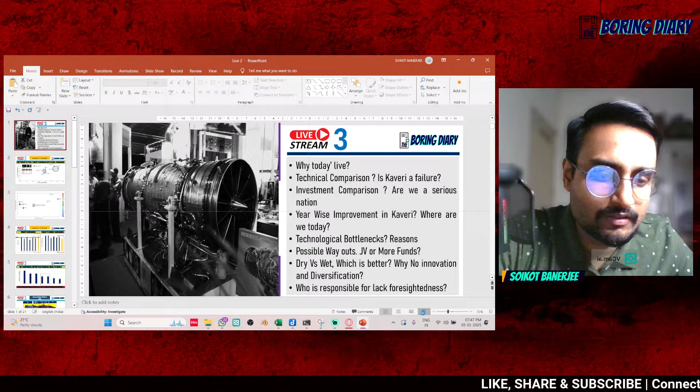तो पहले हम ये डिस्कस कर लेते हैं कि what are the knowledge you will be getting today from this session. First is that we will discuss why this session, the context of this session. Then we will get into the technical comparison of the Kaveri engine, और वहाँ पे हम कंपेयर करेंगे कावेरी इंजन को एग्जिस्टिंग इंजन्स के साथ जो 4.5 जनरेशन की एयरक्राफ्ट्स है।

देन वी विल गेट इनटू द इन्वेस्टमेंट कंपैरिजन। There are some caveats here, but still the investment gone into the R&D of these engines needs to be studied.

Then we will get into the year-wise improvement in the Kaveri engine, and with that will create a question in your mind that what exactly do we want.

Next is the technological bottlenecks that we will be discussing in great detail, and we will also discuss the testing facilities that have been created in India, and what are the gaps there.

And next is what are the possible ways out of these bottlenecks, since we are desperately in need of an engine. And the next point is who is responsible for this lack of foresightedness.

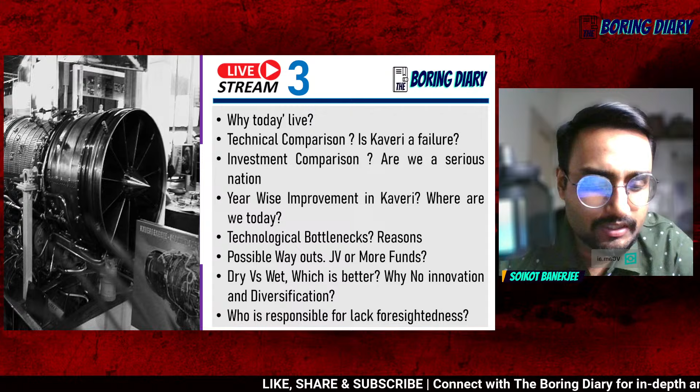fundamentally conceived as an engine that will be used as a primary engine for the LCA program, but it did not come out to be as well as expected.

The fundamental reason for this was, I don't know if you people are aware or not, but when the LCA Mark 1A program was being researched upon, a lot of testing was being done in the United States. I think it's either University of Buffalo, या फिर there is a lab in Buffalo in USA where a lot of the research and development part of the LCA Tejas Mark 1, or the LCA Tejas program as a whole, has happened.

This was before the 1998 nuclear test. Once the 1998 or 1999 nuclear test happened, a lot of restrictions or sanctions were put in on India. After those sanctions, our scientists were asked to leave the United States immediately, and since then a lot of progress that was being made on the LCA program went into vain, and that included the engine part.

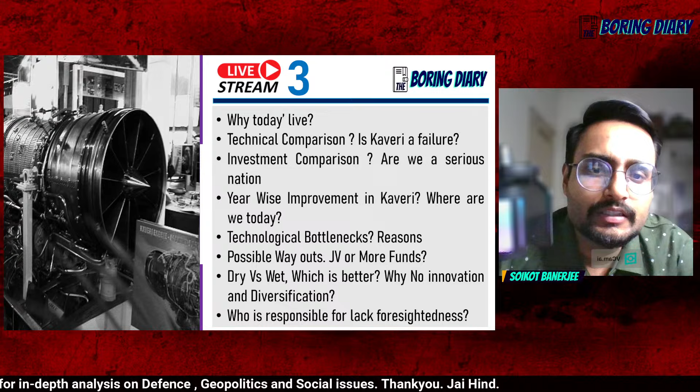आफ्टर दैट, उसके बाद क्या हुआ, हमने कावेरी इंजन पे जो रिसर्च थी वो खुद करना स्टार्ट किया, एंड इवेंचुअली वी डिड मेक सम इंजन्स बट इट हैड मैनी इश्यूज, एंड बिकॉज ऑफ दैट

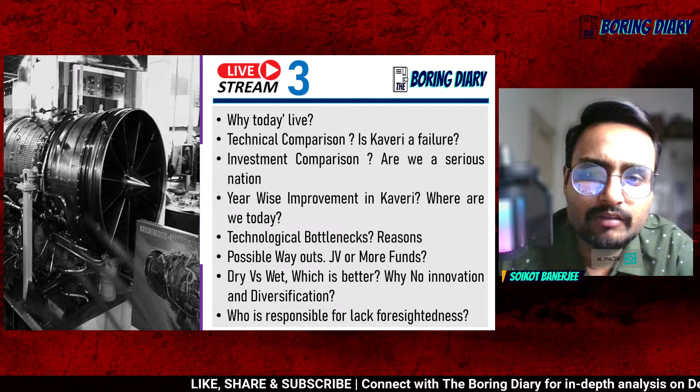that delays had happened. But we will come to see what our country has achieved in the Kaveri engine with the amount of funds that have been given. The ROI has been excellent.

People won't believe it, but believe me, if you compare the ROI, that is return on investment, the amount of investment that India has done and the amount of investment the Western countries or even China has done for that matter, उस हिसाब से India has done a fabulous job getting directly onto a 4 or 4.5 generation engine.

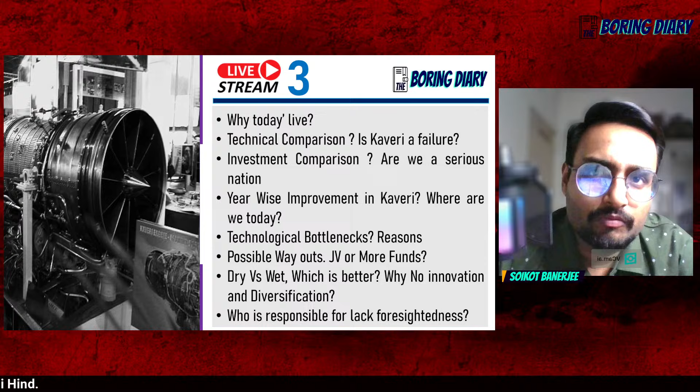Now enough of talking, let's get into the meat of the discussion here. So we will be comparing the Kaveri's thrust with the global competitors here.

So we have the GE404, that is currently the primary engine for the LCA Tejas, both Mark 1 and Mark 1A, the RD33, the WS13, and the M88 engine. GE414 is the engine for AMCA, WS13 is for the Chinese one, and EJ200 is for the Eurofighter Typhoon.

So if you want to know which engine is on which aircraft, I will clear that for you. The EJ200 is in the Eurofighter Typhoon, GE414 I think is on the FA-18 Super Hornet, M88 is on the Rafale - that's why I have marked it in green in the table. RD33 is on the MiG-29, and the GE404, as I said, is on the LCAs. WS13 I think is on the J20, and the Kaveri as such is the subject of our discussion.

So when we plot a scatter plot where on the x-axis we compare the dry thrust - dry thrust is basically the amount of force that the engine is producing without the use of an afterburner - so if you compare the Kaveri with other engines, one second, I will get my pointer.

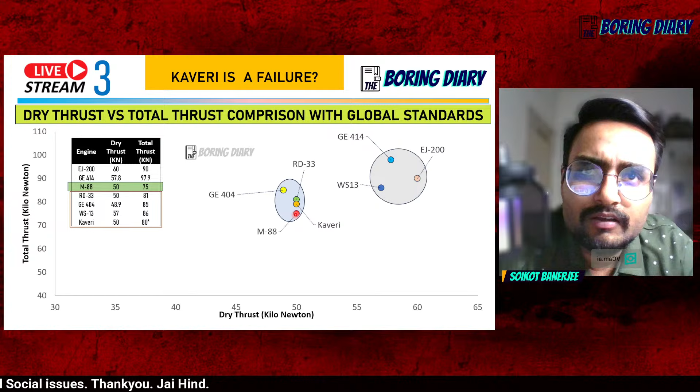But in any case, the Kaveri in its dry format is a very good engine in my opinion, and it is comparable to any contemporary fighter jet's engine in the medium category.

So if we extend the scope of the graph to the weight, this is where the Kaveri's problem starts. It's a heavy engine, and because of that it faces major challenges as of now.

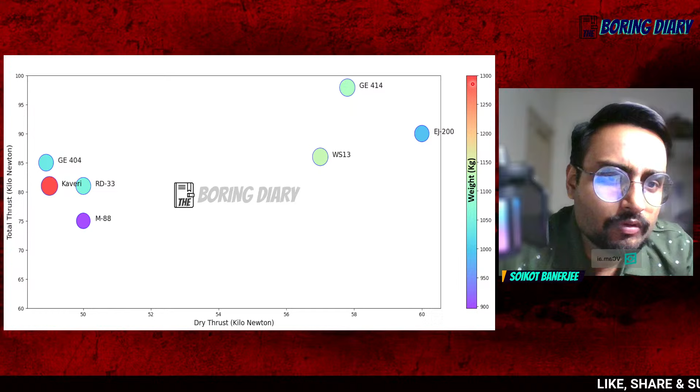So if you see this weight parameter, each color represents a kind of amount - the total weight of the engine, the dry weight without the afterburner. If you compare color wise, green or bluish is a lighter engine, and if the bubble is in red color, then it's a relatively heavier engine.

So if you see that the Kaveri isn't particularly... yes user, X701 it's 1100 kg - no, it's not 1100 kg, I will come to that, it's 1180, I will come to that user.

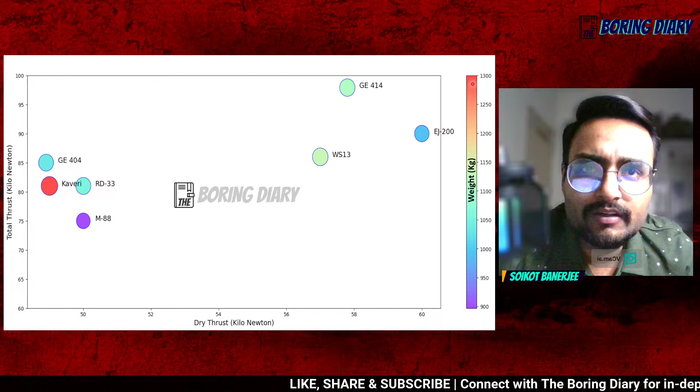So yes, the Kaveri engine is a heavier one, and this is where one of the issues lies. So if we come to the weight comparison, if we take 1100 kg as the baseline, it is not as if the Kaveri engine is extremely heavy - there are many engines that are basically of the same similar category. The Chinese one is 1135, the GE414 is 1110, and the Kaveri engine is 1180.

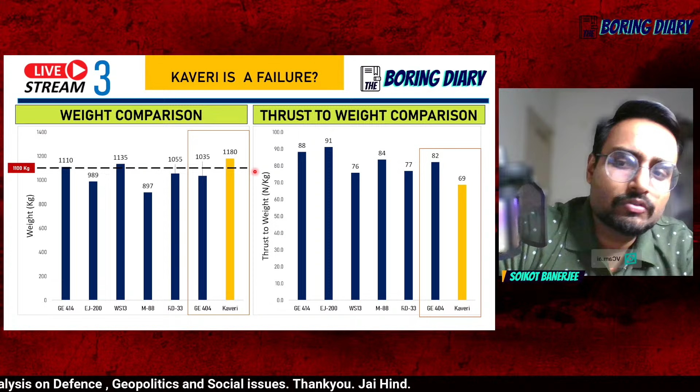So even if we take 1100 as the baseline, we are 80 kilos above getting into the contemporary or peer jet engines. So what is the issue? Being a heavier engine, it costs the Kaveri a lot on the thrust to weight ratio, which is quite compromised because of the relatively higher weight. Again, I won't say this margin is too high, but there has already been a lot of weight reduction exercises on the Kaveri engine.

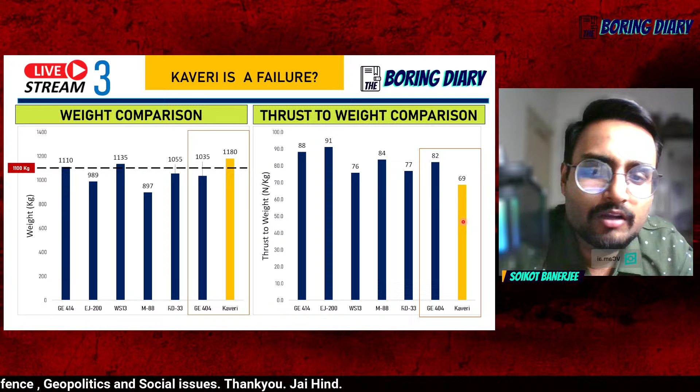If you see all through these graphs and charts, you will realize one thing: the biggest advantage of the Rafale engine, or the European engines in general, is that they are very light. One thing they have sorted out very well is their metallurgy. They have figured out their material science very well, and that has helped them achieve this low weight, which helps improve the thrust to weight ratio of the engine.

But you can see here in terms of dry thrust, the Kaveri is very much close to the M88. But in the total thrust case, when the Kaveri gets to its afterburner part successfully, it will create more thrust than the M88. So that is one thing.

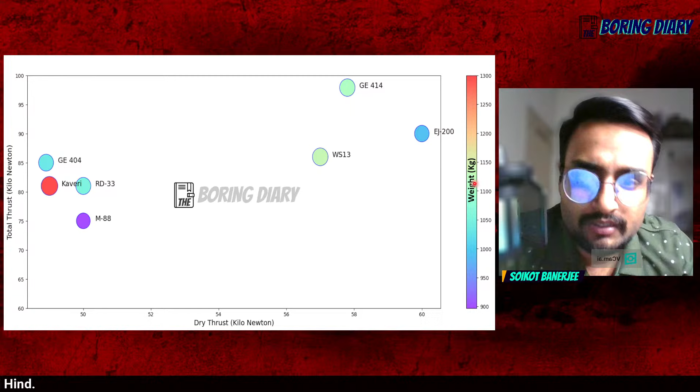This will raise a question that I will share with you in the coming decks: why, if the Kaveri engine becomes successful, it becomes almost equivalent or in some cases better than the Rafale engine. So what makes us think

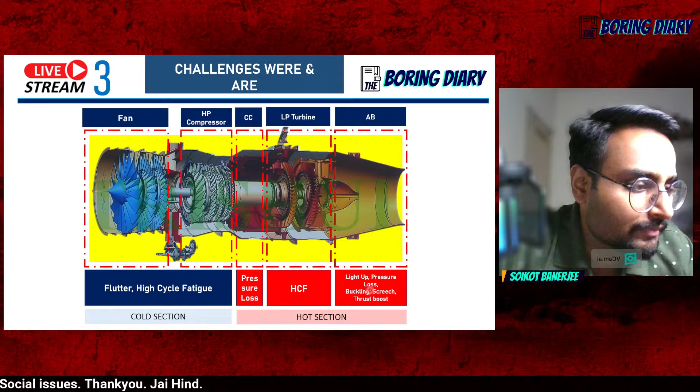Ujjwal ji asks does the current Kaveri use it? I think so, I think the newer one uses it. I will come into it, Ujjwal ji. There is a section in this, and we will get into the hardcore details of single crystal blade. Don't worry, I have covered it here.

So this is the list of issues that are currently existing in the Kaveri, or I would say this deck is from 2022. In the 2022 version of the Kaveri, these were the major issues.

So if you ask me, my analysis is that when the engine is moving ahead into flight test bed in Russia, I think they have figured out a lot of issues, especially in the cold section. They may have figured out the flutter and high cycle fatigue in the cold section, which I will explain, what these issues are and how they look.

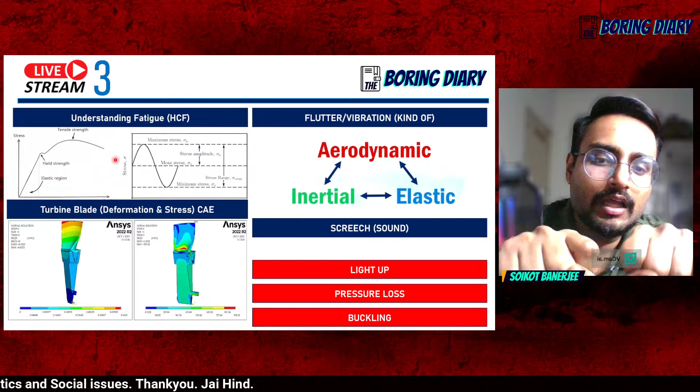तो उसमें मान लीजिए एक्स अमाउंट ऑफ फोर्स लगा, बट आप उस एक साइकिल स्पोक लो, उसको हल्का हल्का बार बार मोड़ते रहो, आप देखोगे आफ्टर एन नंबर ऑफ टाइम्स, पहले जितना फोर्स लगाया था उसके कम फोर्स में ही वो साइकिल स्पोक टूट गया.

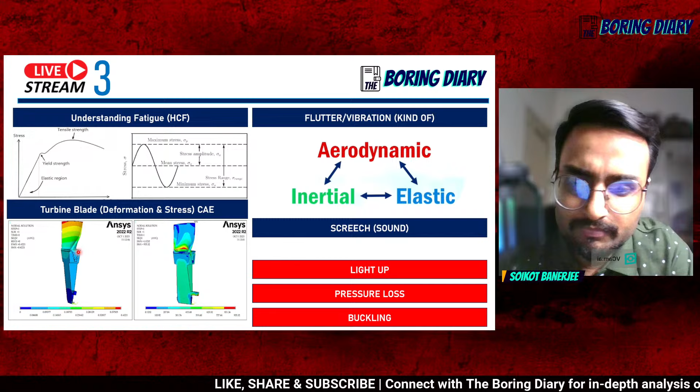So when you see this turbine blade, here I have the turbine blade CAE analysis. So when you see deformation, what are the primary forces on a turbine blade - it is rotating at a very high speed, और उसकी वजह से उस पर एक सेंट्रीफ्यूगल फोर्स होता है, उसके रूट पे इसे फिक्स किया गया है वहाँ पे फोर्सेस होते हैं, और एयर फ्लो और एयर प्रेशर की वजह से भी कुछ फोर्सेस होते हैं. So you will see there is a lot of scope for deformation on the upper part of the blade.

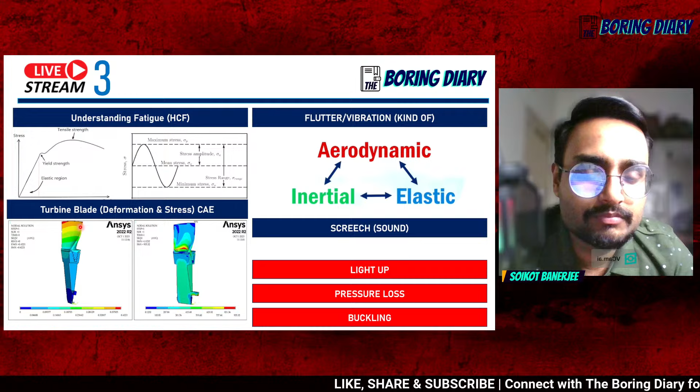That is the problem that was causing failure in the engine blades in the earlier Kaveri engine, that there were deformations happening due to high cycle fatigue, और उसके बाद इंजन में इश्यूज आने लगते हैं.

नेक्स्ट इज द फ्लटर इशू, that is when the aerodynamic force - that is the force of the air flowing - and the elasticity of the metal interact. मेटल का एक अपना elasticity रहता है, और उसकी वजह से फ्लो में जो इश्यूज रहते हैं यानी कि वेरिएशंस, उसकी वजह से... आई डोंट वांट टू गो इनटू एक्सट्रीम डिटेल, बट आई एम गिविंग यू एन आइडिया.

तो उसकी वजह से ये जो तीन फोर्सेस एक्ट करते हैं, उसकी वजह से बहुत ही एग्रेसिव वाइब्रेशन होने लगता है उस टरबाइन ब्लेड्स में. तो ये एक इशू है.

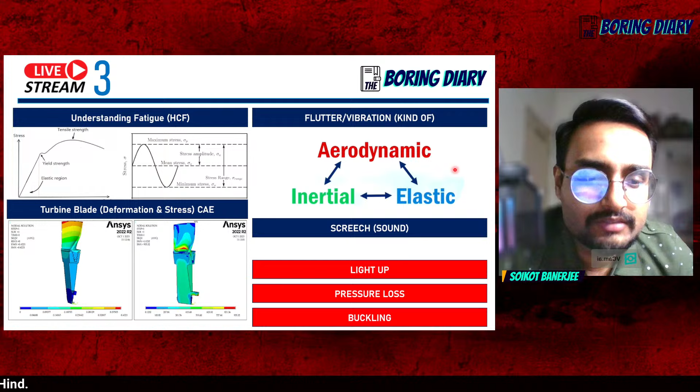स्क्रीच जो आपने आफ्टर बर्नर में देखा है कि बहुत श्रिल साउंड होता है, और लाइट अप, प्रेशर लॉस, बकलिंग - ये सब जो आफ्टर बर्नर में था, these are primarily because of the high heat. So that's a kind of material science issue.

Now coming to the single crystal blades, we need to understand what is a single crystal blade. So if you see here, this is a microstructure of titanium or any metal you take. If you look at any metal in the microscope, you will see these little terrains or grains like structures with black color boundaries to it. These are called the crystals, and these crystals basically contain atoms of the particular metal.

What this actually means is that the atoms, in this case, are aligned in different ways. I am oversimplifying, but the fundamental part is that the atoms in the polycrystal material are aligned in different directions, and when these grains interact with each other, boundaries are formed. सो सिंगल क्रिस्टल ब्लेड में क्या होता है, ये बाउंड्रीज होती ही नहीं है. नाउ व्हाई आर दिस बाउंड्रीज बैड?

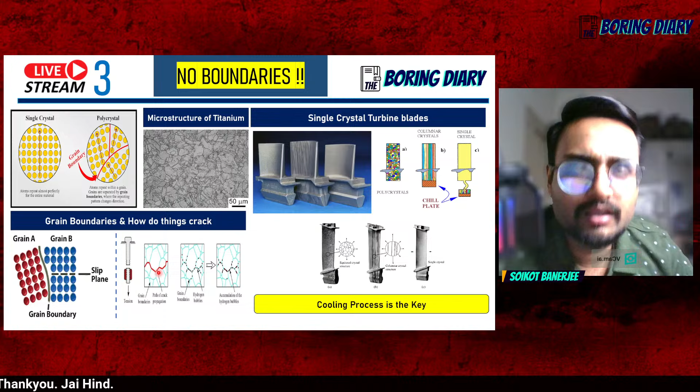So whenever you see that a failure happens, a crack happens in a metal piece or something, these cracks actually initiate from these grain boundaries. So if these grain boundaries are removed, this will improve the strength of the object by many times, both the strength in general and the heat resisting capacity of the turbine blade.

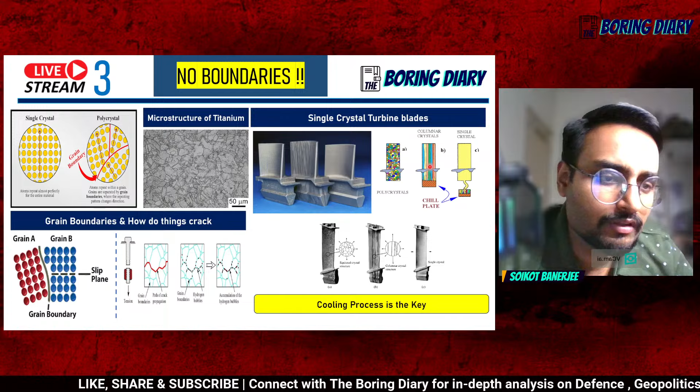So this brings us to the diagram here. This is a polycrystal, that is multicrystal turbine blade which is not a single crystal. This is columnar crystal, that is blades where the crystals are in the vertical direction, with boundary grains, and the single crystal blade has no boundaries, no grain boundaries. So this is how a single crystal blade looks - the right one here is the single crystal blade, this is the columnar crystal blade, and this is the polycrystal turbine blade.

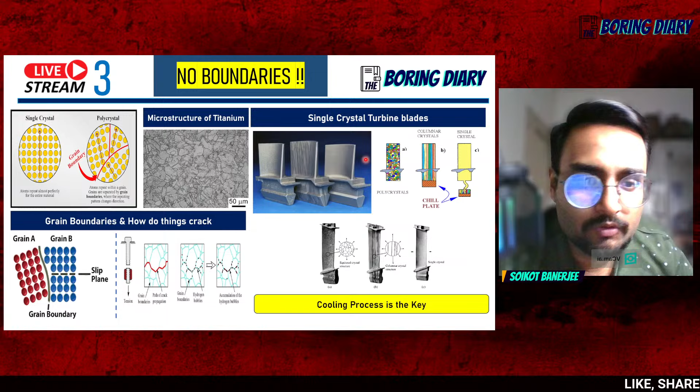So we are looking to get success in this single crystal blade for fighter jets in this case. So how is this single crystal turbine blade created? This single crystal turbine blade is a magic of cooling - we have to cool the molten metal in a certain way to get this particular structure, single crystal structure.

So before that, मुझे आपको ये समझाना पड़ेगा कि जब मेटल कूल होता है तो वो कैसे होता है, तो उसमें ग्रेन बाउंड्रीज कैसे होती है. So let's move on to the metal solidification process.

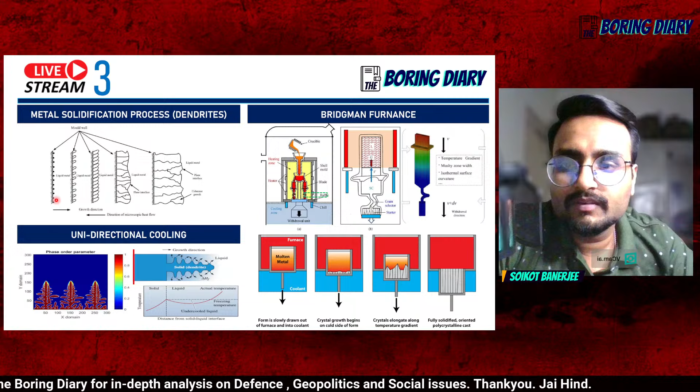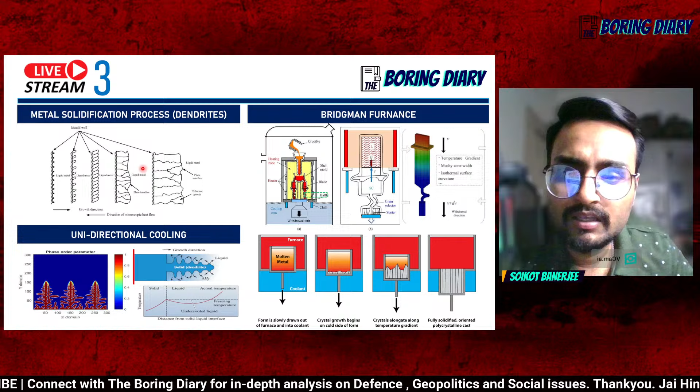मोल्ड वॉल, अगर आप देखोगे इसमें लिक्विड, लेट्स से आपने यहाँ पे मोल्टन मेटल एक ग्लास में डाला और बाहर से ठंडा एनवायरनमेंट प्रोवाइड किया, then these dendrites are formed, and these dendrites slowly move ahead towards the center of the jar or crucible you have taken for solidification, and these grains are formed. So this is the dendrite formation in case of solidification of metal.

So in case of these single crystal blade, जो कूलिंग होती है, वो ऐसे होती है कि आपको एक ही साइड से कूलिंग देनी है. जैसे तलवार जब बनाते हैं तो गर्म लोहे को पूरा का पूरा पानी में डुबो देते हैं. जब आप पानी में डुबो देते हो, then you are giving cold temperature from all sides.

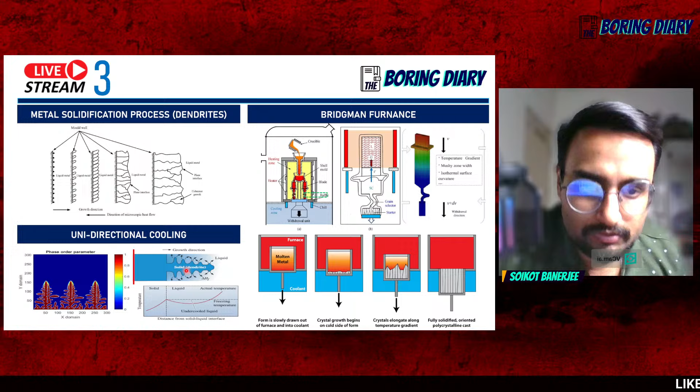बट व्हाट आई एम टेलिंग इज़ दैट अगर आप उस गर्म तलवार को बस उसके लोअर या फिर अपर पार्ट, यानी कि जो नुकीला पार्ट है, वहाँ से ही सिर्फ कूलिंग टेम्परेचर प्रोवाइड करते हो, तो उस केस में जो सॉलिडिफिकेशन होगा वो अलग होगा। या आई विल कम टू दिस कंपनीज पार्ट, नो इश्यूज।

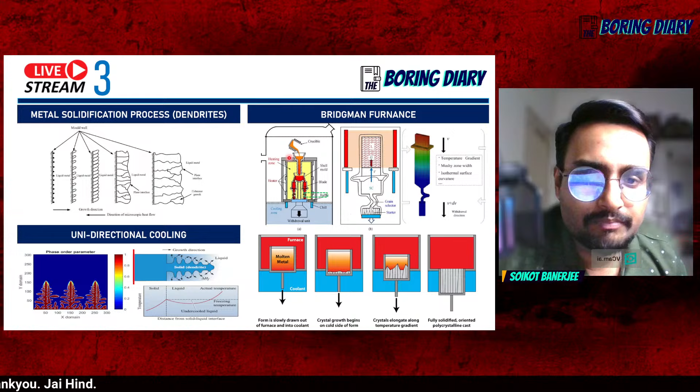So coming to the part कि कैसे बनता है सिंगल क्रिस्टल ब्लेड. दिस इज़ अ ब्रिजमैन फर्नेस. यहाँ पे क्या होता है, आप देख रहे होंगे यहाँ पे।

ब्रिजमैन फर्नेस में यहाँ पे आपका फर्नेस है, यहाँ पे आपने अपने टर्बाइन ब्लेड्स के मोल्ड्स रखे हुए हैं, और नीचे से आपको कोल्ड टेम्परेचर सप्लाई किया जा रहा है थ्रू कोल्ड वाटर और वट एवर यू हैव. सो आप पूरे के पूरे ब्लेड को नहीं डुबो रहे हो फॉर कूलिंग, बट आप नीचे से उसको कूलिंग टेम्परेचर दे रहे हो।

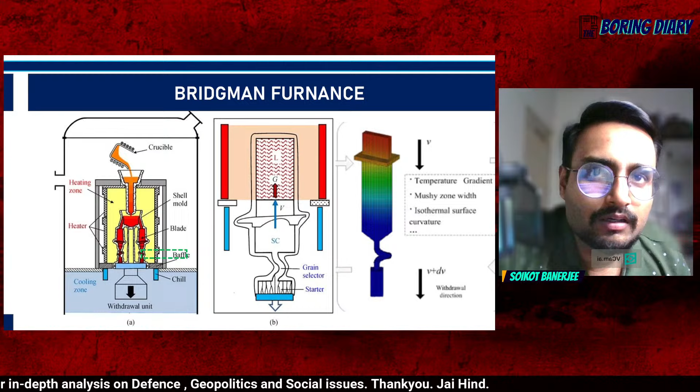एंड टू अवॉइड मल्टीग्रेन स्ट्रक्चर एक फ़िल्टर टाइप दिया जाता है उसको, वो एक हेलिकल 3D पाइप की तरह होता है, जिसे ग्रेन सेलेक्टर या पिग टेल बोलते हैं. तो ये जो मल्टीपल ग्रेन फॉर्मेशन स्टार्टर में दिख रहा है, दिस फिल्टर आउट दिस मल्टीपल ग्रेन फॉर्मेशन, एंड इट अलाउज ओनली सिंगल क्रिस्टल to propagate upwards towards the hot chamber. So ऐसे बनता है आपका सिंगल क्रिस्टल टर्बाइन ब्लेड।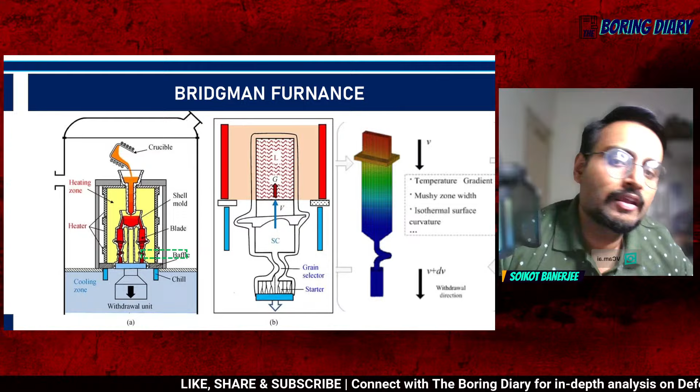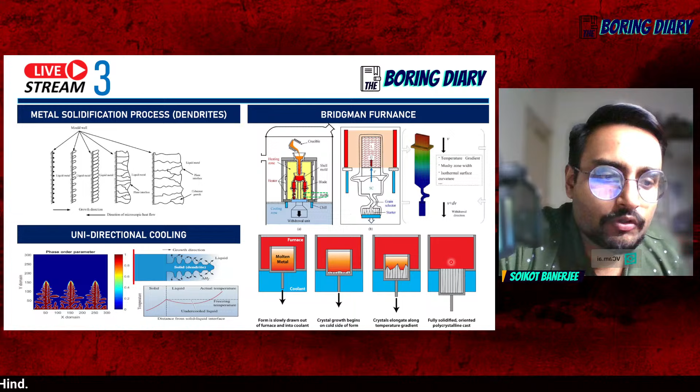इस कूलिंग प्रोसेस को बोलते हैं यूनी डायरेक्शनल कूलिंग. यहाँ पे जो स्टार्टर वाला पार्ट है उसका एक डिटेल्ड व्यू है. यहाँ पे मल्टीपल ग्रेन्स हैं, फिर यहाँ पे एक सिलेक्टर या पिग टेल लगाया जाता है. पिग टेल के थ्रू सिर्फ एक ही क्रिस्टल ऊपर की तरफ सॉलिडिफाई होता जाता है, and then it becomes, then the entire mold is solidified into a single crystal blade।

So the good thing about titanium, we have a good news which I will be discussing in the next slides. Titanium has been a challenge for us because in general titanium across globe has been primarily supplied by Russia and some handful of certain countries. I think even China is also a major player in the supply chain. So that is one thing.

So the good news is that PTC Industries has opened a furnace. How many furnaces I don't know, but the investment says there are more than one furnaces opened for making these titanium ingots. These titanium ingots are a very key issue in the engine and fighter jet development as well. You need titanium alloys in the engine and in the aircraft body as well. दोनों केस में आपको टाइटेनियम की बहुत ज़रूरत होती है because it's strong, it is light, and it has now become the standard go-to base material for high tech military grade equipments.

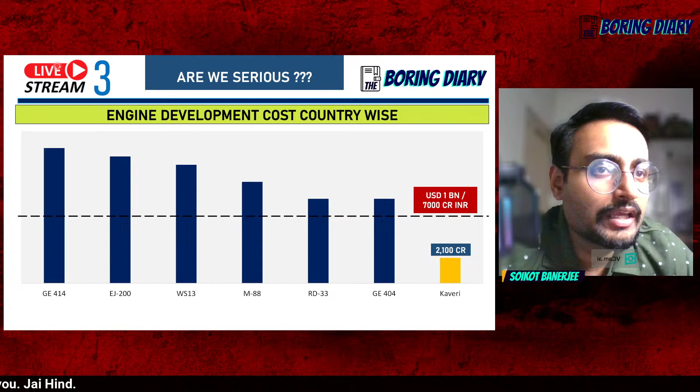Now comes the funding part. So these are some funding that I have understood, the Americans have actually pushed in more than $1 billion on their single engine, meaning on each of the engine development program. They don't have just one engine program running, and वो लोग पानी बहाते हैं engine development पे. I will come to the joke that has been created out of Kaveri. But if you see, this is a $1 billion mark for an engine development program, and they have developed jet engines for, Americans have developed jet engines for...

Okay, so Somnath da, I understood. Japan is also, yeah, thank you. I will come to the questions once I am done with the presentation.

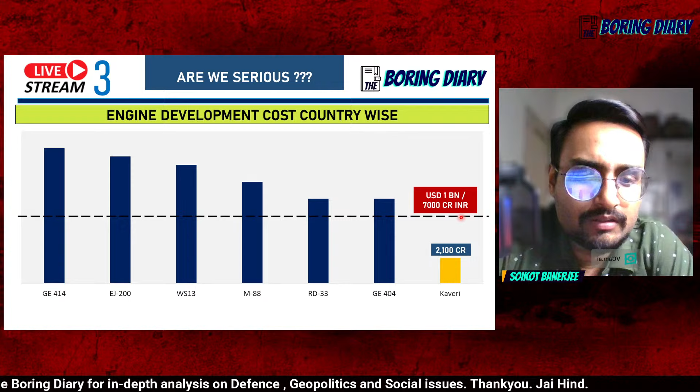Coming to the Kaveri thing. The joke of the Kaveri engine is that we have been able to create an engine providing us almost 71 kilonewtons of thrust, albeit with some struggles. That is not close to what was needed for the LCA Tejas, but it's close to many fourth generation fighter jet engines. We have compared with some of them, in the 70 to 75 category, one of them being the RD-33.

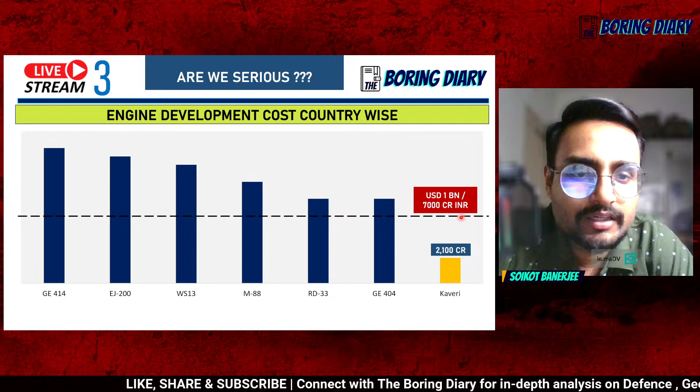You go out comparing LCA Tejas with foreign platforms, but they don't compare the funding that these platforms and their engines have got. What we have achieved in a very limited constrained budget is unparalleled. And by 'we' I mean the DRDO. Of course there are inefficiencies, but this is unparalleled. The ROI is huge, it can't be compared.

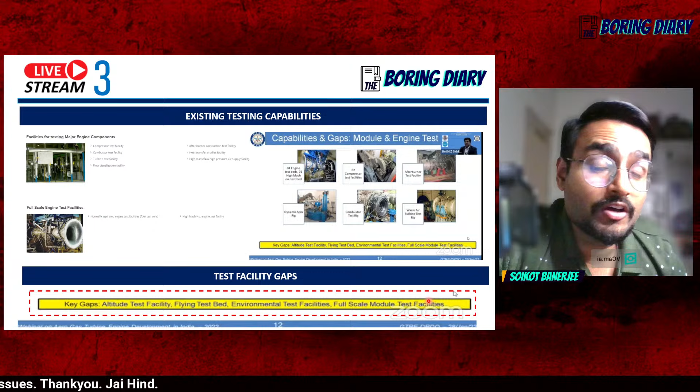And then environmental test facilities. See, environmental testing facility is one area where there is a lot of scope for any businessman looking to invest money, because environment test facilities are needed everywhere - be it in case of jet engines, tanks, APCs, radars, guns. Environmental testing facilities are a must have for any military hardware platform development.

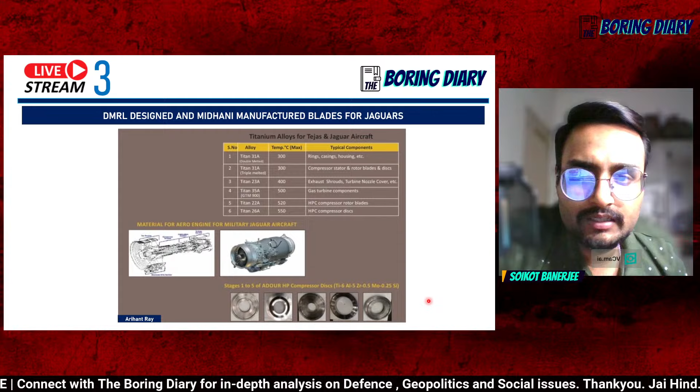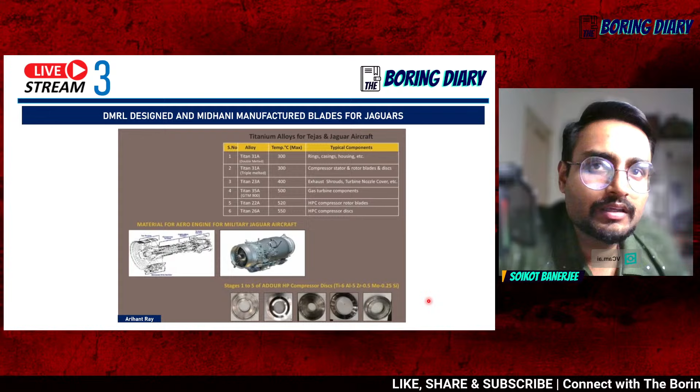Next, there have been some progress. This is one I got from Twitter - somebody shared that DMRL designed and MIDHANI manufactured blades were used for refurbishing Jaguar's engine. So if we speak about two major players currently manufacturing titanium or titanium products - finished products, not extracting ore and refining, but finished products - that is MIDHANI, and I think even Bharat Forge does it to some extent. I'm not clear, but in any case MIDHANI is one such major player.

All these developments give me some sort of hope, but it also has a baggage of concerns for me, and most of the concerns come from the budgeting part. The budgets are too low. We are not serious about this. In talk we are serious, but when it actually comes to allocating funds, we don't look so serious. Now next point is the private sector jet engine.

I've heard many people ask why the private sector is not developing a jet engine. So look, I shared a lot of this design process with you - how much trial and error, time and money goes into it. Do give it a thought, are Indian companies willing to invest this much into developing a full grown fighter jet engine? I think not. We will have smaller scale turbine engines, but a full scale jet engine from a private player - it won't happen anytime soon.

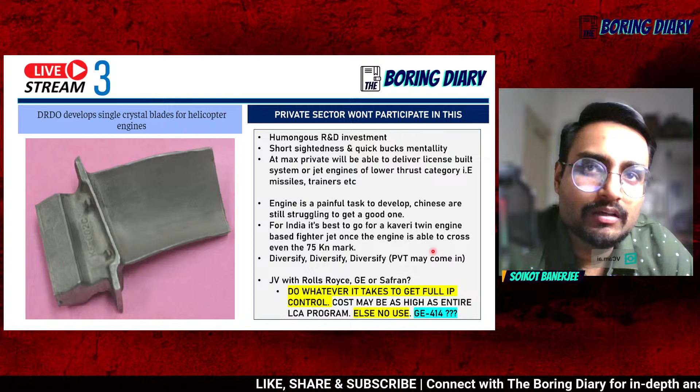Next, from the presentation you might be aware that the Kaveri engine needs to be diversified into other fields where gas turbine engines are usually deployed, mostly in the power sector. We can also spin it off into marine engines, and other applications wherever gas turbine engines can be deployed.

Next point is about JVs. On the JV with Rolls Royce, GE and Safran, I'm not going to comment, but we should make sure if we are getting into a JV, we should have complete intellectual property control of whatever transfer of technology we are asking for.

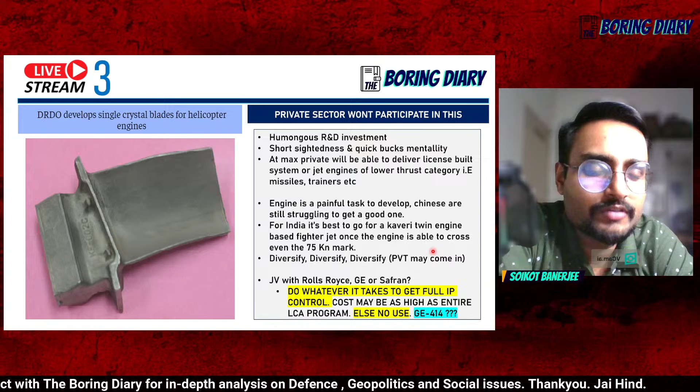And if it costs a hell of a lot of money, maybe equivalent to the MRFA deal, or even the entire cost of the LCA program, make sure that if you are taking transfer of technology of the core section, it should be full and final, no strings attached, nothing, no ifs and buts from the selling company.

That's how it should be taken. And I think if complete transfer of technology happens, the government should publish what the caveats are, but should not disclose the amount, provided they are able to secure complete intellectual property.

Next slide. This is my thought on the Kaveri's scalability. These are my thoughts: Kaveri's scalability is a huge competitor to global players.

Somnath, this might be an answer to your question. Kaveri's scalability is a huge competitor to global players. Why will anybody give you transfer of technology to create their own competitor? Even if it does, are there any strings attached regarding India's sovereignty or market access for Kaveri related products in future? That needs to be answered by whoever is concerned.

Now someone will say, who am I? But I am no one, yet people should know that when deals regarding strategic systems happen, it should not come at a cost of our sovereignty.

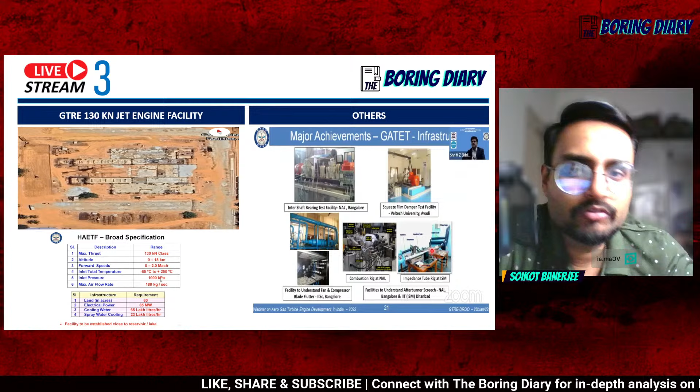Hopefully, because if you understand that in the last test in 2022, it was able to generate 48.5 to 50 kilonewton of thrust, that means the blades were doing pretty well. In that case we can infer that if they used the single crystal blades in the low pressure turbine section during that test, it was working perfectly well. But again, this is an inference.

CMCs, I am not sure if they have gone for it till now, but a single crystal blade maybe. CMCs may also be there. I did see some pictures of CMCs that were shared in some of the Aero Indias and Defense Expo by DRDO and GTRE.

On J20, can India's AMCA counter the future threat from China? I will make a different presentation for J20 and J36 and regarding AMCA.

Again, this takes a lot of effort to produce this deck or presentation. I think AMCA isn't going to be a 5th generation fighter, it's going to be a 5.5 generation fighter, because the core or fundamental part of a 6th generation fighter is not just the shape and the platform, it's also the avionics. So if we are able to integrate the avionics well into the AMCA, it can be given a capable 5.5 generation capability.

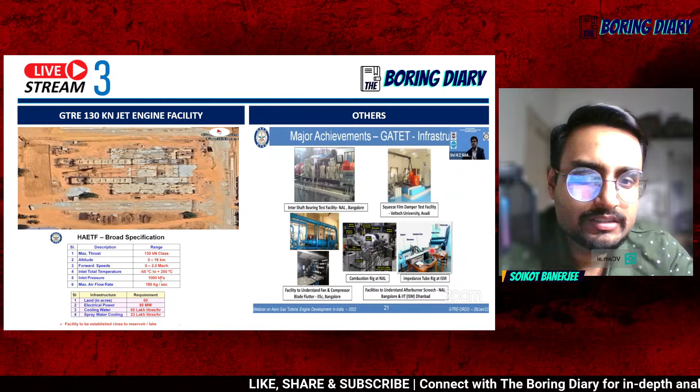So J20 and J36 are a threat, but even if we go well with our existing Su-30 MKI upgrade programs, LCA Mark II which I think is up for first flight this year, and we are able to produce the AMCA Mark I by 2032 or 35, then we don't need to worry that J36 or J20 are there. But we first need a decent amount of indigenous fighters in the 4 to 4.5 and 5th generation category.

Again, my thinking is that as we go ahead in time, the technologies that come up in this platform will be better. It will be far better in terms of preserving sovereignty if these technologies are generated in-house, majorly generated in-house with some foreign help, but I think the intellectual property must reside with India, that is Bharat.

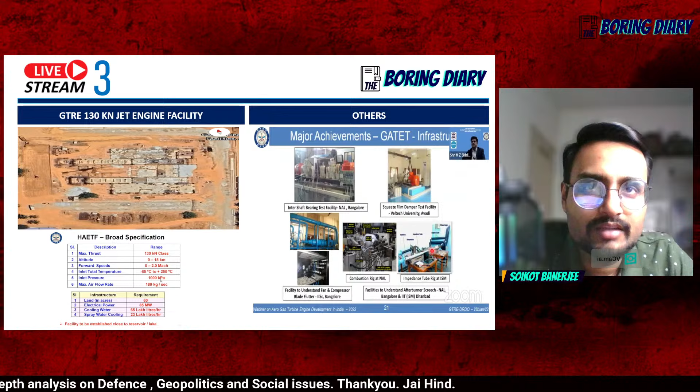What needs to be done to reduce weight in our engines? It's purely material science, sir. We need to put more money in our metallurgy. Our best metallurgy people mostly go abroad. People don't have any idea the amount of material science engineers that leave this country for pursuing higher studies in Germany and the US.

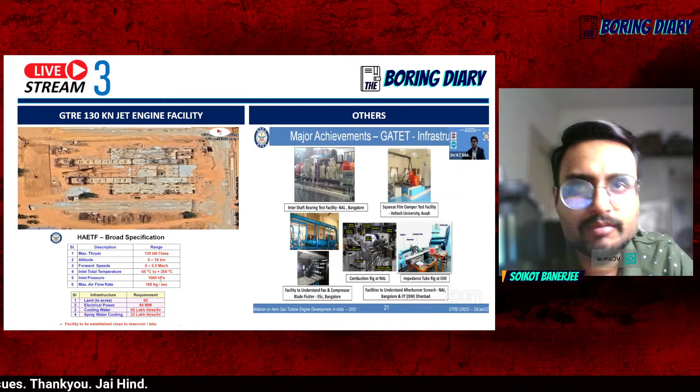Don't you think US is a threat to India? I don't think threat as per se. I won't pass a sweeping statement, but yes, there are two parts in USA - one is very pro India, one is not so pro India, because the not so pro India part sees the world as a binary. That is, if somebody is friends with Russia, then that country is against America. They think too much in binary, and that is causing the general geopolitical issues coming forward within the relationship of USA and India.

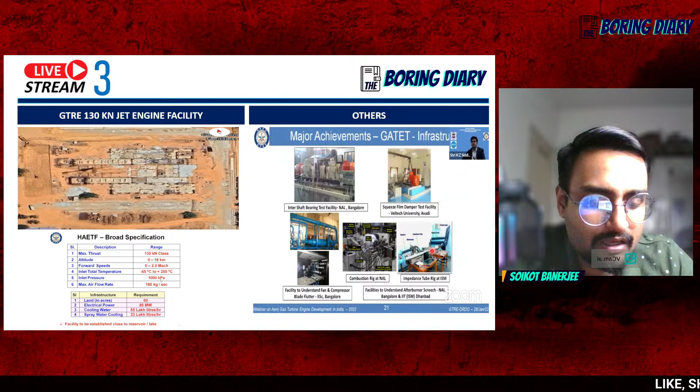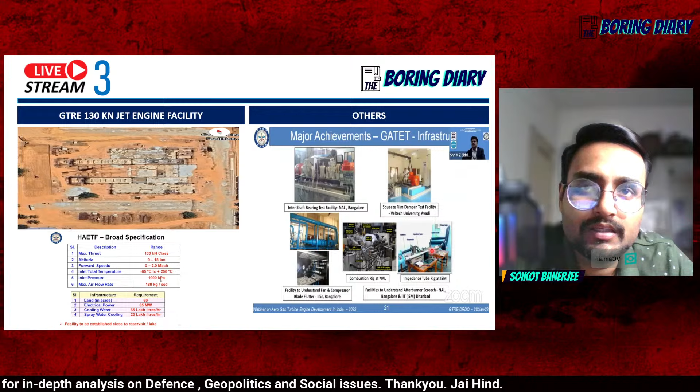I think so, as I said, I can't say with complete authority whether it's in there or not. But considering that in the prior test the engine was able to over-deliver on the benchmark, that alone proves the engine was able to sustain increased temperatures in the low pressure turbine part, and that gives me a hint that the new single crystal blades might have been there, because DRDO has already delivered single crystal turbine blades for helicopters, to be used in helicopters by HAL. This is the single crystal blade that DRDO has developed. So I think they have incorporated single crystal blades, but I can't say with complete certainty.

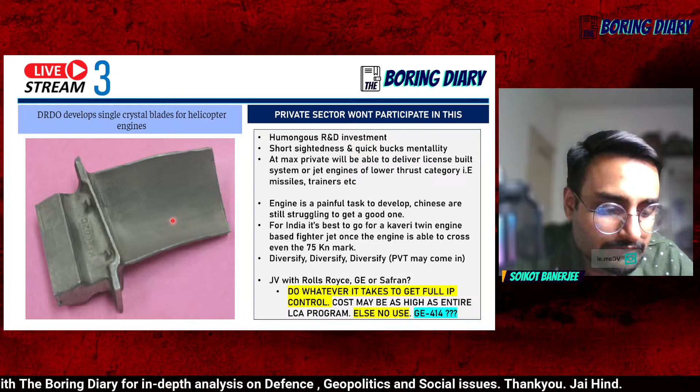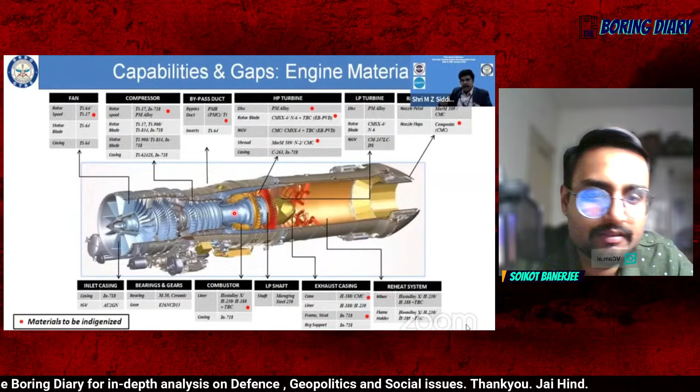GE-414 must have a backup, that's why we have a 130 kilonewton test facility coming up. This particular engine being discussed was a potential AMCA jet engine of the 110 category class. So yes, we are looking for an alternative to GE-414. The government may not have funded any such product yet, but DRDO is focusing on research based on its internal funds.

But again, any and all engine programs regarding fighter jet engines must now be taken into mission mode, and these laboratories handling these projects must be brought into the ambit of the Prime Minister's Office for rapid results, just as Bhabha Atomic Research and ISRO-like organizations are under the purview of the PMO.

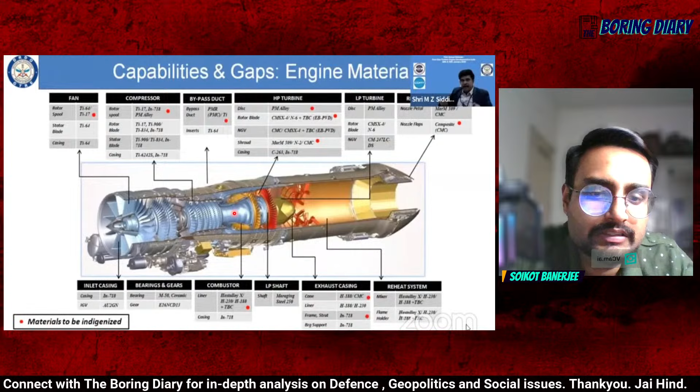And as I said, if the engine is sorted, if the Kaveri is sorted and we're able to figure out the hot section now, it's a very scalable product. It won't take much time to make spin-offs for passenger jets, for gas marine engines. It's a huge project, the Kaveri engine.

It's a huge project of strategic interest, and that is why there are many interests that don't want the Kaveri to succeed. That is also one thing. So you will find a lot of naysayers saying this and that. You must understand there are many vested interests that are against the Kaveri.

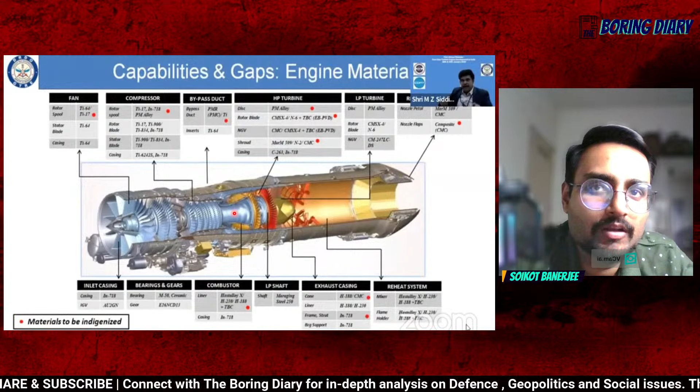They will keep bad-mouthing the Kaveri. But we must ask one question: compare how much has been invested into the development of Kaveri in the last 10 years, and how much the Chinese have spent developing their engines in the last 10 years, and what has been the output. Fundamentally, the ROI for Kaveri is huge. Nobody understands that point.

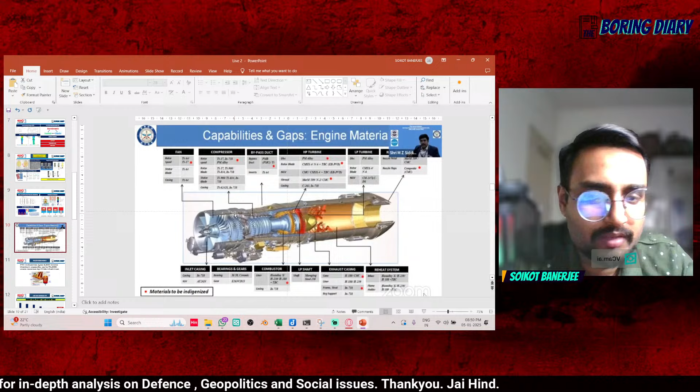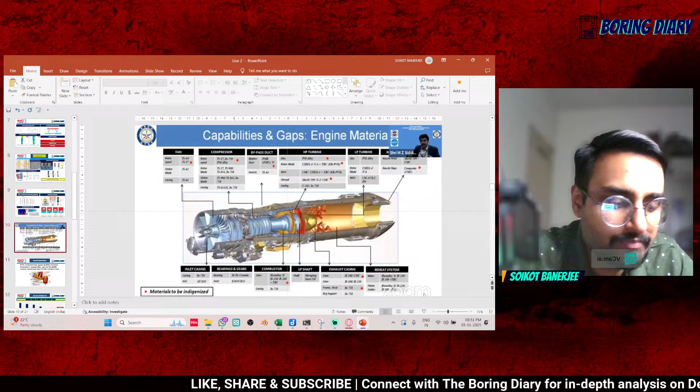Is there any titanium in the engine increasing the weight currently? Subramaniam ji, I think the afterburner part is the most troubling issue right now. I think the titanium part is not the problem causing the issue, but there may be, as I said, a problem part.

I will share it again. So you see this. The hot section part is the most troubling part, and out of that the afterburner part is the most troubling part.

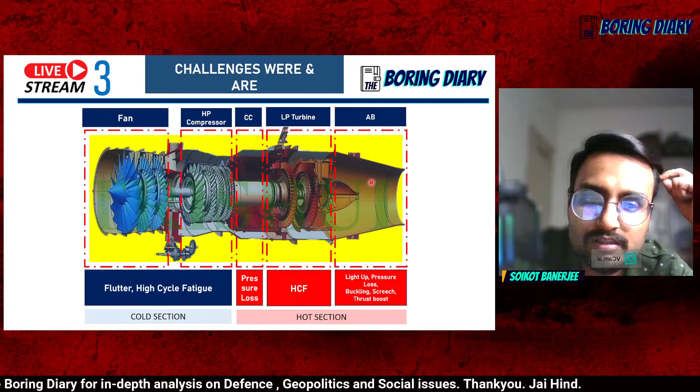The afterburner is also called the reheat system, and the temperature here goes even beyond what is in the low pressure turbine part. So once the afterburner is implemented, to augment the lack of metallurgical skills, we have to increase the weight by adding more material to avoid any kind of failure in the afterburner. That is primarily causing the increase in weight.

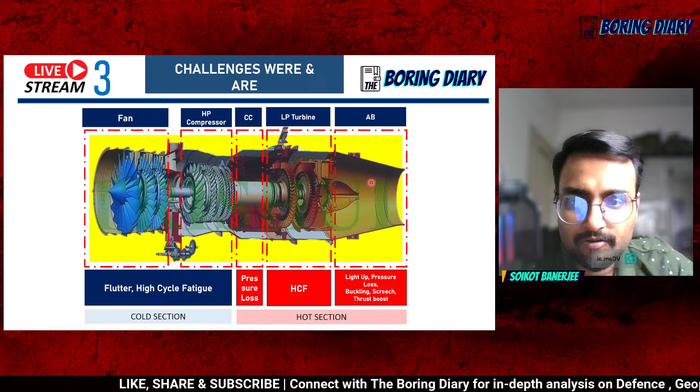Also, the weight currently is a matter of metallurgy, since titanium is not the fundamental issue, the alloys are. The alloys are basically titanium plus some other metals, creating an ideal mix of weight and strength. That is a very trial and error kind of job, and takes a lot of research and development. You have to be very particular about the perfect composition of alloy that will give you reduced weight and the strength you require.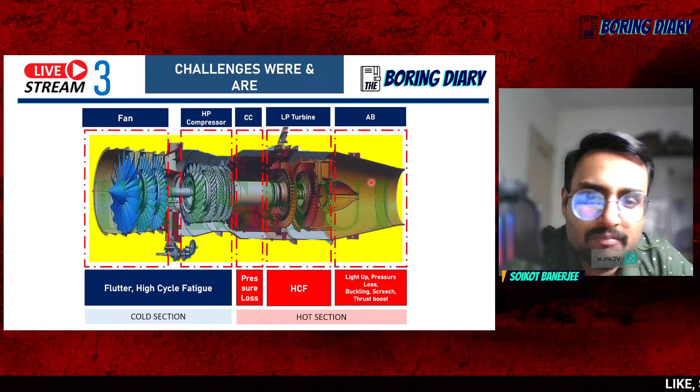Does the Kaveri derivative also weigh the same? I don't think so, it will be lighter. I think the new variants going into Russia may be a bit lighter. But again, there is a 30 to 35 kg difference, 1180 kgs, and the WS13 is around 1135. So that's only a difference of 45 kilos vis-a-vis the Chinese engine, and vis-a-vis the GE404 100 kilos, and GE414 it is around 70 odd kilos.

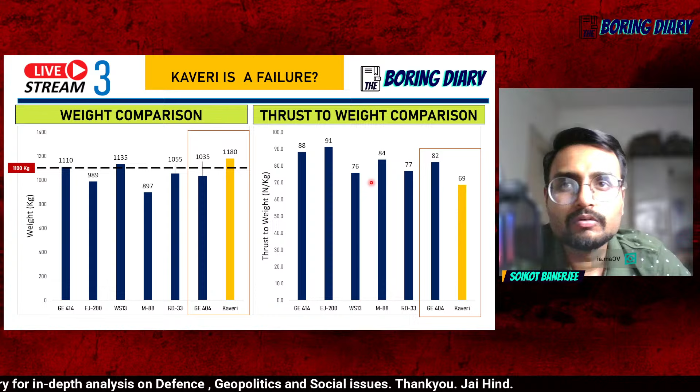So we are close, and the thing with this kind of development is that as we get closer to our benchmark, it becomes even more difficult to achieve. That's a general life principle as well.

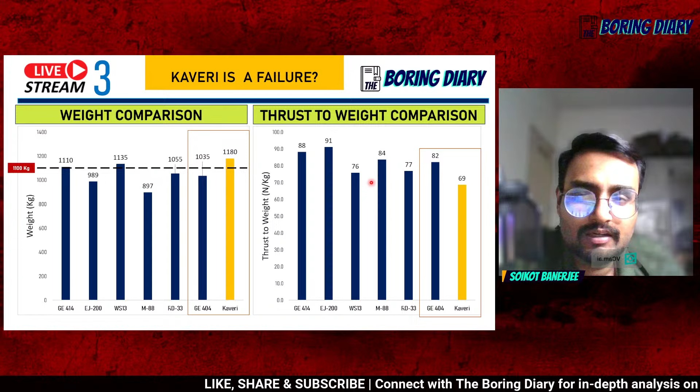Yes Subramaniam ji, we have to get the correct composition of the alloy, that is the issue. Titanium is not directly used, the alloys are the important part. So research on alloys has to be done, and the compositions have to be figured out.

That is where AI can be used actually. That is one place where AI can be used to come out with a set of compositions that satisfy our boundary conditions.

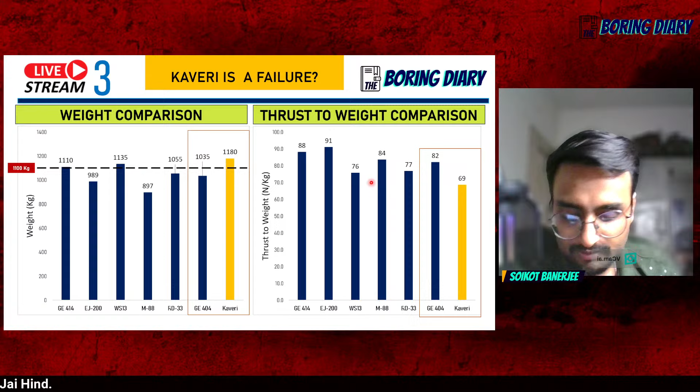Yes, even I am waiting, Ujjwal ji, for the Aero India. A lot of information will come from there as well.